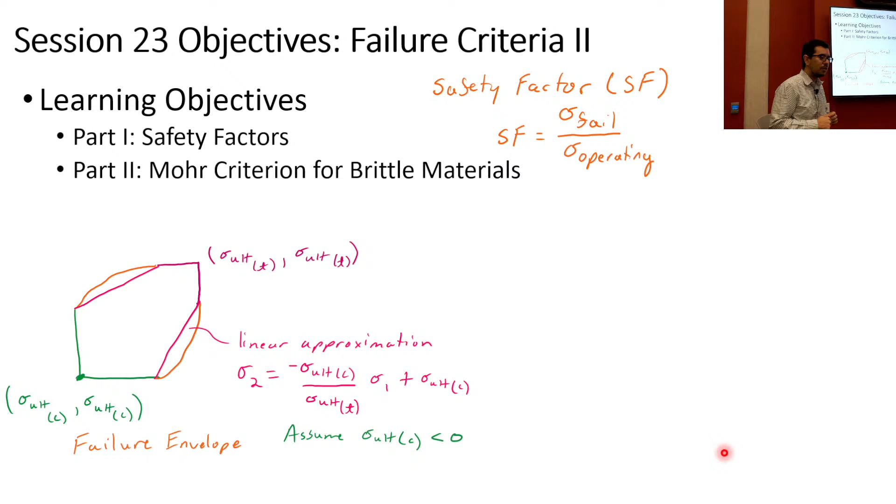All right, before we get to these great theories though, first we're going to cover safety factors. Okay, these are deceptively easy, okay? Because I get confused on them, and well, maybe it's just me, okay. But you might find them deceptively simple, okay? And then we'll get into a criterion for brittle materials, that's called the Mohr criterion.

And then we'll get into maximum distortion criterion for ductile materials, okay? So, what do you guys think of when you hear factor of safety? You can say maybe in the mechanical sense or the non-mechanical sense. Yes? Like an extra cushion to. Yeah, it's your extra cushion, right?

We have a buffer. We have our last day of no planned material because that's our cushion, that's our buffer, right? We didn't know what could happen during the semester. And we've been fortunate that we've been able to do stuff without too much impediment. Okay, so what else? How else do you all think of safety factor? Overrated? Overrated, like safety factors are overrated? Okay, I don't suggest that in your interview for an engineering position you say, that one's overrated.

That's overrated, really, we just go for the leading edge, right? We just go for the leading edge, and if it fails, it fails. Yeah, that's probably not a winning strategy, okay? So, like we're talking about this cushion, right? If I'm going from College Ave to Livingston, right, how much time do you put in there? What would you estimate, 20 minutes? Okay, College Ave to Livingston, all right, fine, 20 minutes. And then how much variability? So that's how much time you estimate, but if you want to be on time, how much of a buffer do you put in?

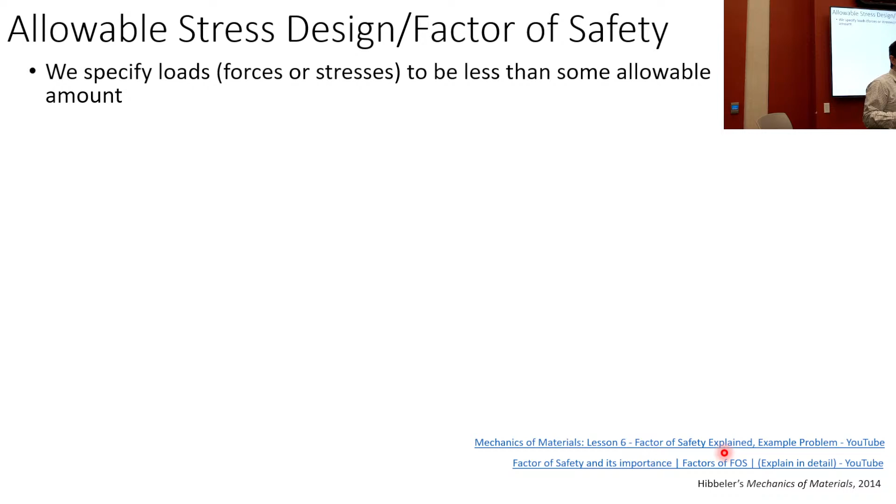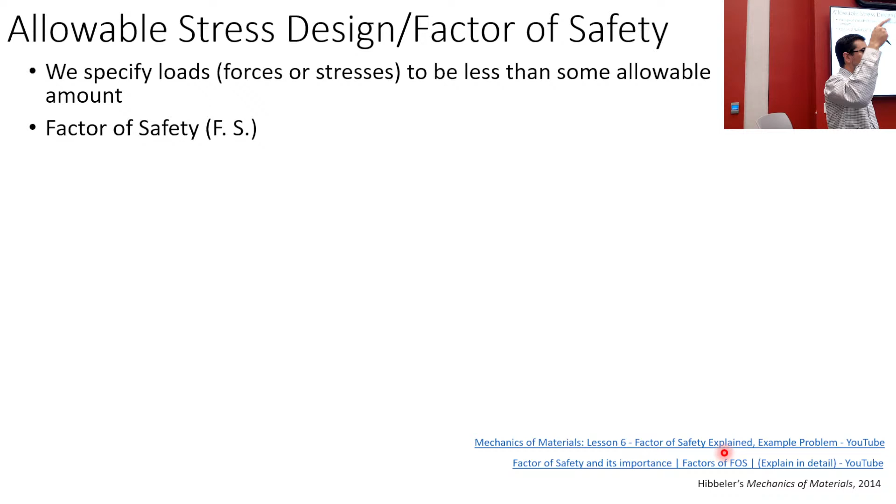We are going to specify in the mechanical realm that our forces, our torques, our stresses are supposed to be less than some allowable amount. We can think of the ratio of this allowable amount to what the loading actually is as a safety factor. Another way to look at it: this is the force that's going to cause the system to break, and I'm going to tell you, you better not go above a certain amount.

So, if you're making a table, and you know that table will actually break at 300 newtons of force on top of it, but on the instruction manual you say do not load above 200 newtons - that's 300 divided by 200, that's a safety factor of 1.5.

So like in thermodynamics we have quality as a factor, and that's supposed to be between 0 and 1. Is there a range for safety factors? Yes, I'm glad you asked that - good foreshadowing.

Okay, so if you're doing an aerospace project, your safety factor is going to probably be less than if you're doing a more conventional product for a mechanical system. And why would that be? Why do you think you would use a lower safety factor with a lot of aerospace systems compared to mechanical systems? Yes, people can die in aerospace. But when I'm using lower safety factors, does that mean there's more probability of death?

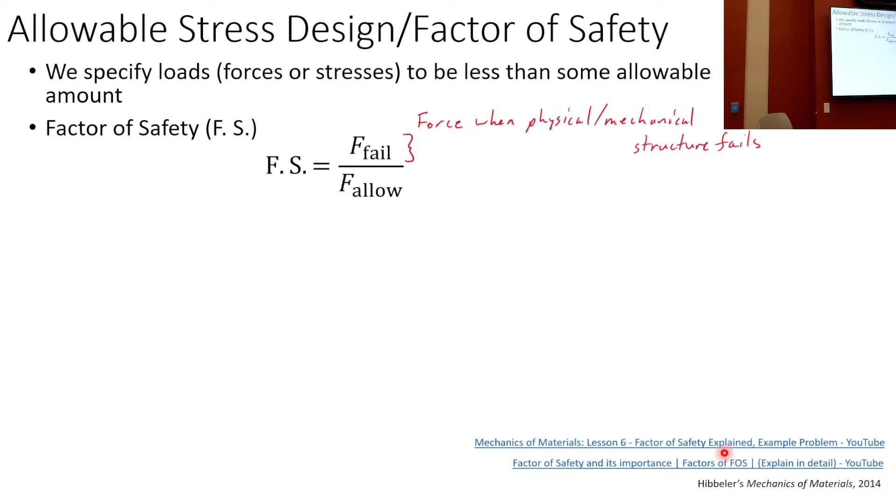Okay, so here are some different ways to think of safety factors. Safety factor could be a force when it fails. So this could be something akin to the yield strength times cross-sectional area. That would give you a force at failure over some force that's being allowed. So this is what you anticipate or specify the force that you can handle might be.

Another way to look at it is in terms of the stresses. So you can think of this as the stress at failure, where you would plug in sigma y, your yield strength, or you might plug in your shear strength, and divide by what your load is. And here's the shear form. So we're going to do larger than 1 for these, okay?

Have any of you ever broken anything? Okay, chalk? Yeah, last time, yes, Jeffrey, we did. Jeffrey, we did break some chalk last time, right?

Often, the whole structure doesn't fail all at once, right? That would be a wonderful design. It's like you've got it perfectly set up so that when you put that load on, it all breaks at once. Would that be wonderful? No. So as a designer, as a mechanical engineer, you're going to be looking for the hot spots, and you're going to be beefing up those areas and making sure the system is able to handle this. So if you think about F fail and F allow, that's more like a global thing, but then you're also looking at what the local stresses are.

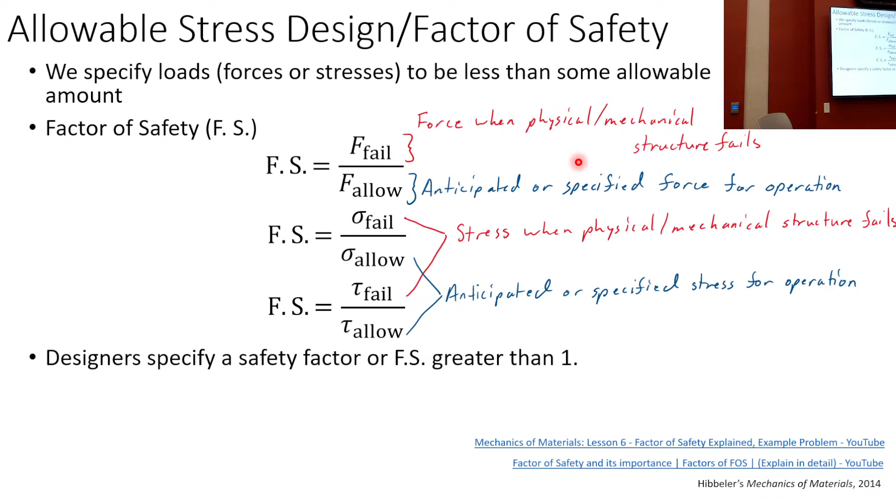So another way to think of the safety factor is as what your stress fail would be, divided by your operating stresses that you anticipate. And as we were saying, the wording can be confusing. You'll see that in a minute. I don't think I have to say much more about that. The wording can be confusing, all right?

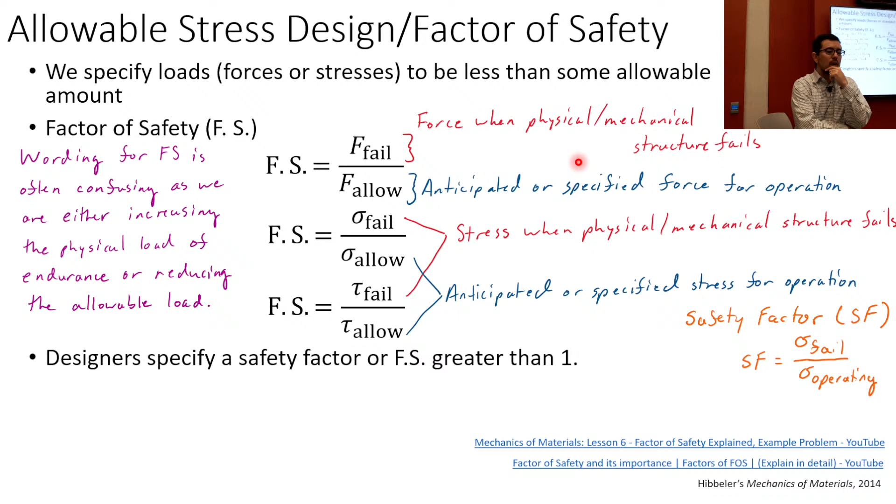But we can change your safety factors, obviously, by either lowering the allowable load or increasing the maximum stress, okay? And if you want to look at a fun, thought-provoking video, you can learn a little bit about planned obsolescence.

Okay, are you familiar with this term at this point? You all probably are at this age, in your generation. Planned obsolescence, what is it? So is it in a company's best interest for you to buy one product from them and never buy another product from them? Oh, plan failure? Yeah. No. So is it in their best interest?

Like Ford and car manufacturers back then, yeah, so car breakdown, right. All right, what else do you replace every few years? Tires, yes, tires. So if your tire's not as strong as it could be, so that they have to come back and buy them again. Not that they refuse it, but it's an idea, all right.

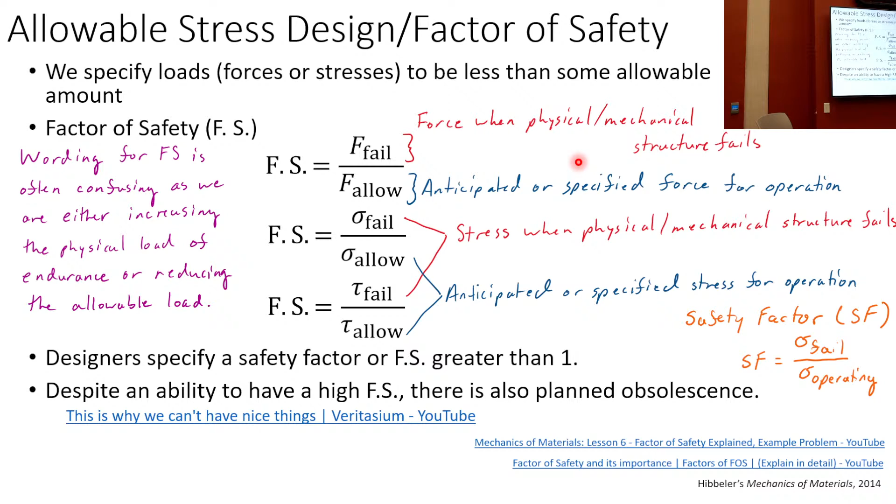And Chris was talking to me about this, phones, all right? The older cell phones lasted for a while. Now we have dates when we know they're no longer going to update the security things. Good day. But instead, it's planned obsolescence. Okay, let's keep going, I'm going slow.

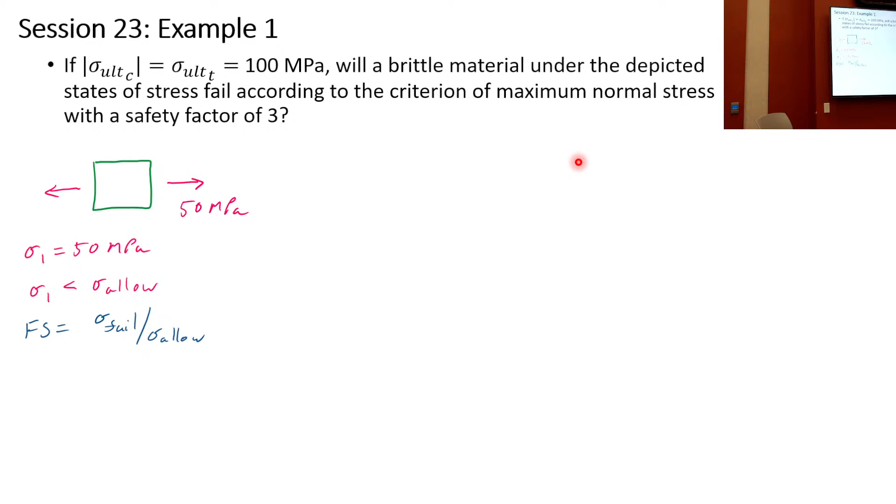100 megapascals, right? Okay, what is Fs? Fs is the factor of safety. They're saying that needs to be 3. So what does that make this allowable stress? 33 about, right? 33 and a third. So you put it all together and you now know that your allowable stress is 33 megapascals.

And that is not greater than sigma 1. So you're gonna have to... Okay, see how this works? No, okay, what's the question?

Everything? I actually don't understand the 50 MPa. Where does it define what it is? Professor, it's just that, I'm so sorry. It's just that the result, if it's less, that's the result, that's correct, that's what you're saying.

Right. So if we go above the allowable, we have an issue that it's going to break, right? Or we're not - it may not break, to be honest, right? But it doesn't satisfy the specified maximum, all right? Which is based on the safety factor, right? That allowable is the max that we are going to withstand.

The 50 megapascals, this is an element. We did this last time - we actually had the same exact box. This is a uniaxial loading, all right? Meaning this is an element that has just sigma x or sigma y or sigma z, in one direction. So sigma 1 is equal to 50 megapascals, sigma 2 is equal to 0, and sigma 3 is equal to 0. So this is the current stress, this is the state of stress on an element.

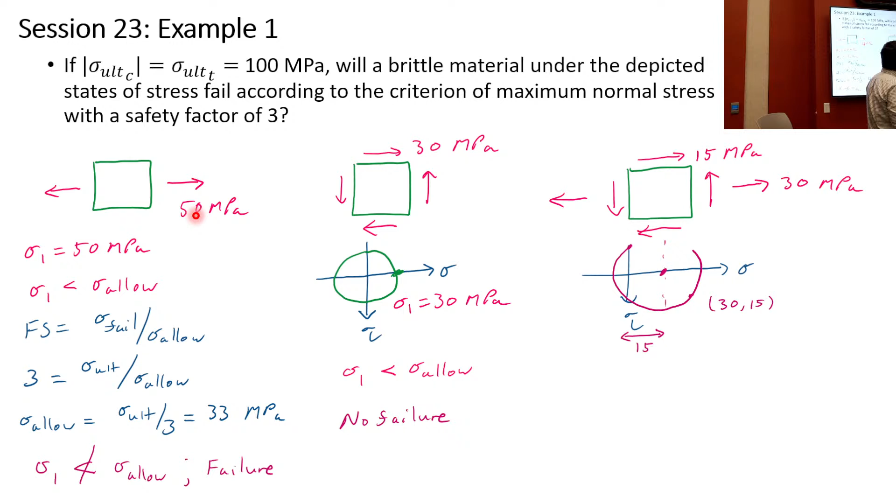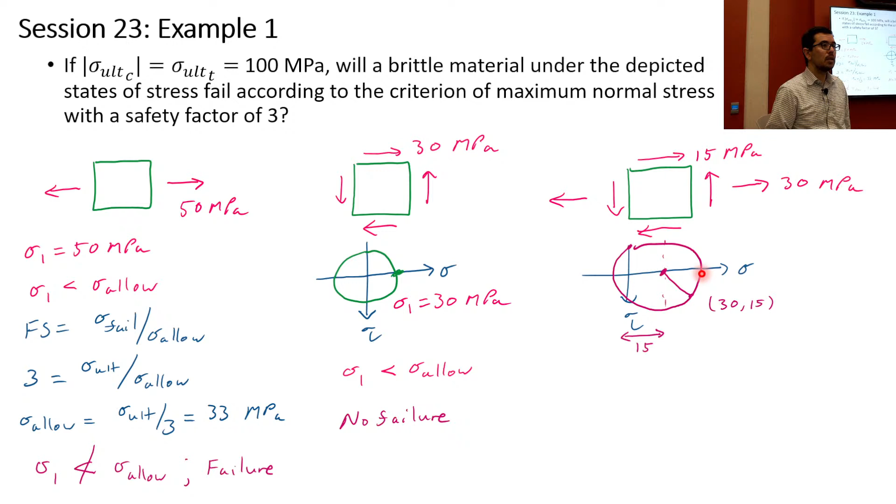So now we got to figure out, if we rotate over to here, that's where the maximum stress is going to be. So let's look at it. Sigma 1 is going to be what? It's going to be 15, right? That's the average, right, is 15, right? The average between sigma 1 and sigma 2, right? Sigma 1 plus sigma 2 divided by 2, that's just 15, because sigma 2 is 0. So that's where we are - or sigma y, sorry, sigma y is 0, I should say it like that. So sigma x plus sigma y divided by 2.

That's that, okay? And then here, this is at an angle of 45 degrees, okay? Because this is 15 here, and this, okay, is out here. So then we can say that the length that we're going to have over here is going to be 15 square root of 2, and then we add it to the average, and that's how we get 36. So 36 is not less than the allowable, okay, which means that we will have failure.

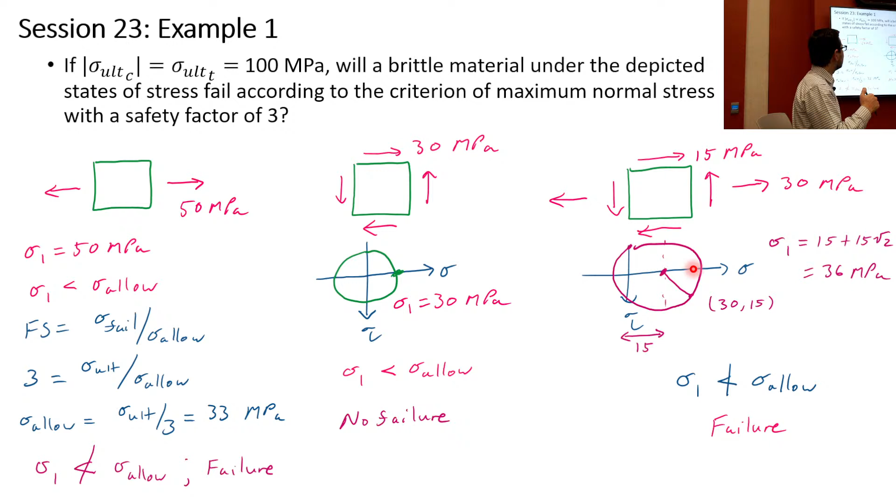All right, so what I'd like you to do is take a minute and look at this one. This is your first homework problem. And then after you've taken a look at this one, there's another one too. But take a look at this one first.

Your numbers are different than mine, but you have a sigma x, and a negative sigma y, and the other stresses are all equal to zero. Now the question is a little bit flipped, because it's asking what is the safety factor according to the criterion of maximum shear stress, if the yield strength is 200 megapascals.

So this is a little bit tricky, right? No, it's not? Okay, so if I give you a yield strength of 200 megapascals, let's look at it this way, because we're using maximum shear strength criteria. If I give you a yield stress of 200 megapascals, what is the maximum shear stress that material can handle?

So if this is the yield stress, I hand you this material - it's a piece of steel or a piece of aluminum, and either one could have a maximum yield strength of 200 megapascals. I ask you, without looking at this element or this configuration of stuff going on, what is the maximum shear strength of this material? I said the yield strength is this - you tell me how much shear can it handle?

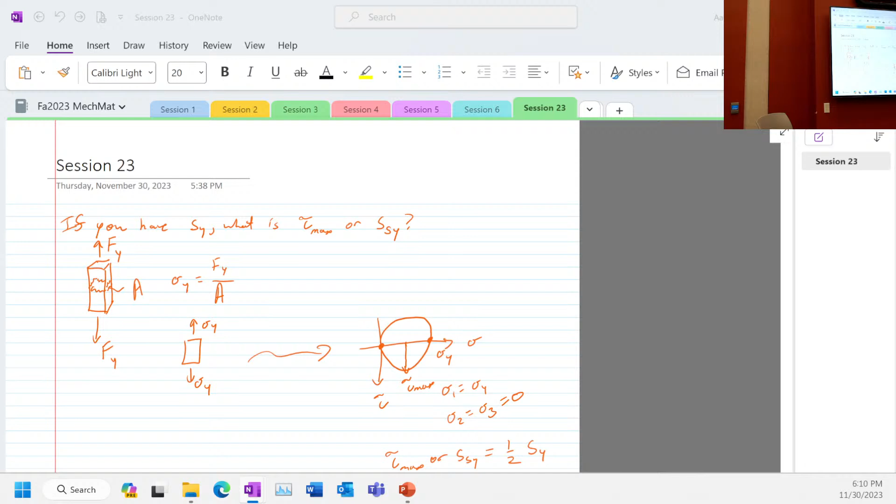So what's the maximum shear stress that I can have? Right, the maximum shear stress is down here. And that's going to be... okay? Any questions on that? So to even start this homework problem, you probably want to think about what is the maximum shear stress the material can handle. So now we know that's the maximum shear stress the material can handle. What is now the...

So let's go back. Can you see this? Yes. Okay, so that's the maximum shear stress the material can handle. What is the maximum shear stress now in the part? That has to be calculated carefully. If I told you - so we've got this element, this is 100 megapascals, this is 50 in the negative direction. What does the Mohr circle look like here?

Okay, so this is saying that we have a sigma 1. What is the sigma 1 here? Yeah, so we'll say this is sigma 1. We could call this sigma 2 or sigma 3, the negative 50. Okay, all right. And then what's sigma 3 in this case? 0, right?

Okay, so what am I have, multiple Mohr circles, right? So I have this Mohr circle, I have this Mohr circle, right? And then what's the final one? It's the one that goes between sigma 1 and sigma 2. Or sigma 1, yeah, sigma 1 and sigma 2.

All right, so then what's the max that I have here? Yep. Okay, all right, so we could call this my operating, if you want, tau op, right? And this is like my tau allow, or no, I won't say tau allow, tau fail.

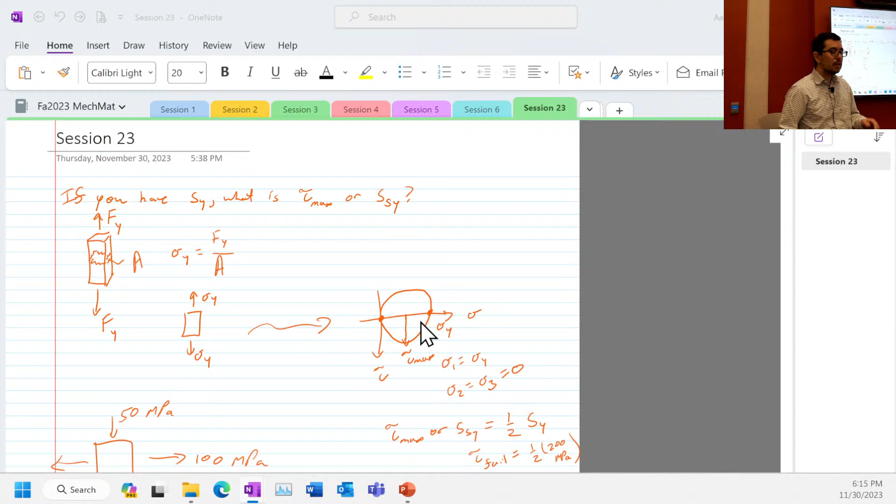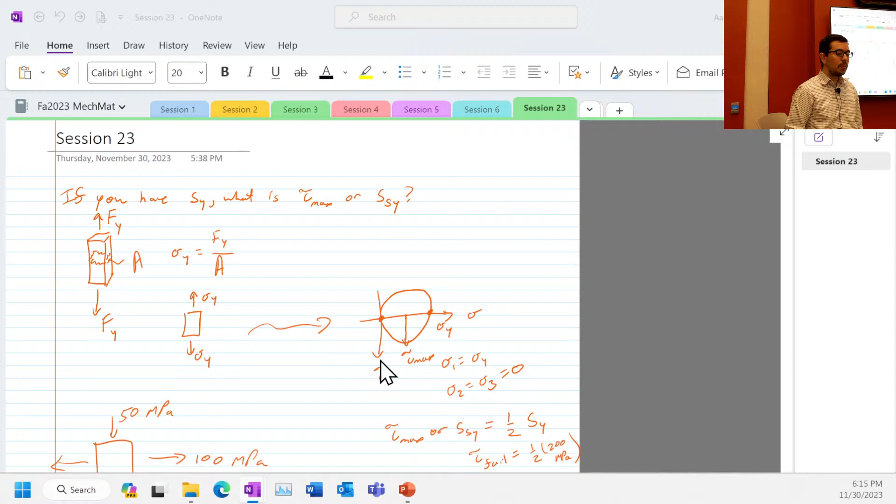Okay, it's because when I have uniaxial loading, when I calculate the yield strength, it's only in one direction. Sigma 2 and sigma 3 in this case are 0. But I need to know the maximum shear strength. Right, so for a lot of these problems, you have to construct a Mohr circle to know what the stress at failure is, so that you can compare that stress at failure to the stress during actual operation, or the allowable stress.

Okay? Any questions on this? Okay. Yes.

Okay, so if this is SY right here, do we agree on that? So what's this down here? Half. Is that okay? Is that right? Okay, no, I mean that's fine.

Okay, there were crickets a few minutes ago, so I guess there are multiple people who have had this question because there wasn't an immediate response. Yes, Kevin.

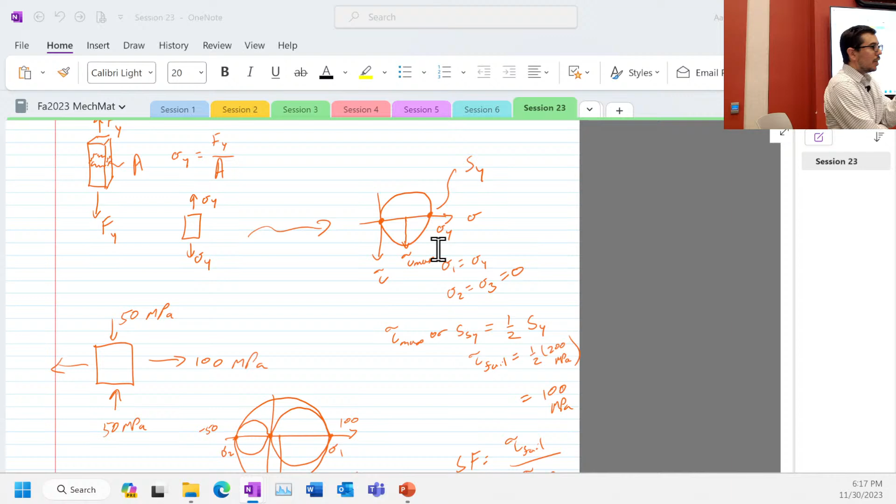In all situations, is the yield strength equal to twice the maximum shear stress then? Yes, in all situations. Well, okay, if it's a specified yield strength, and I care about the maximum shear strength, yes, that ratio is as we've defined here. But in this example, when you're only talking about shear stress, does that relationship still hold?

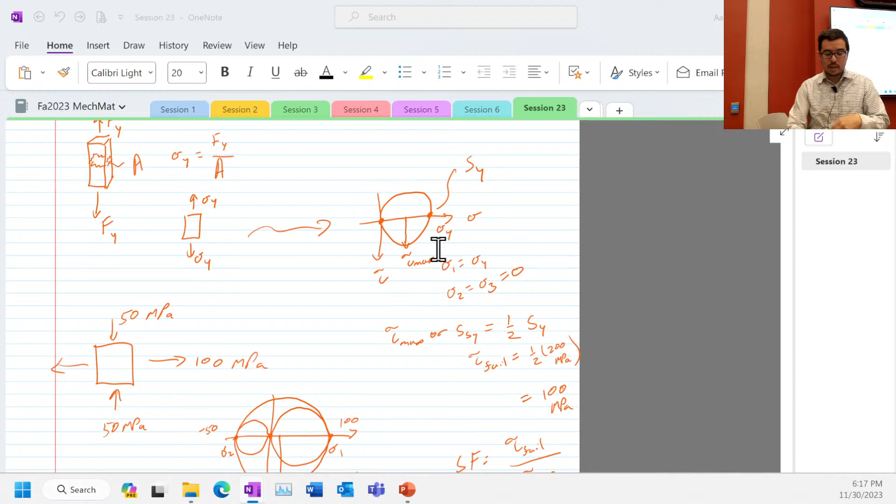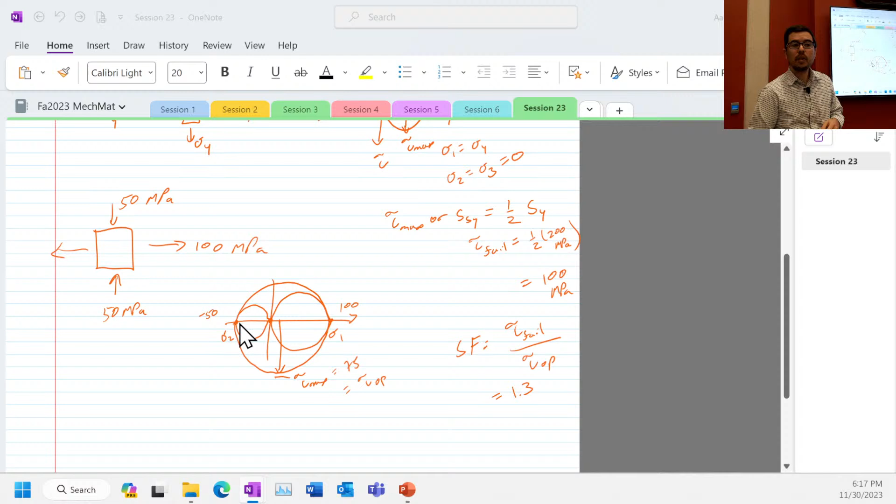When we're talking, so in this case, because we were, yeah, yeah. So with stress and with strain, the relationship is unchanged. Hold on a second, stress and strain, where does strain come into this? I'm sorry, I thought you just said strain a second ago. Oh, I'm sorry, I didn't mean to say anything about strain. Okay, I didn't mean to say anything about strain. Okay, if I said something about strain, it slipped. Sorry, okay, this is all about stress.

So the yield stress is always equal to twice the maximum shear stress. Yes. Okay, for this, for uniaxial loading, right? Okay, okay, okay.

But we'll get into some situations in a little bit where it's a little bit dicier, okay, where you got to think a little bit about. Well, we'll just get into them, and then I'll explain why it's a little bit dicier. Okay, you got to think maybe not just about what's happening with the yield stress or the shear stress, but you might think about the combo loading. Okay, and how if I increase both combos by the same factor, how that would affect a safety factor, right?

Because in this case, let's just look at it this way. In this case, if I increase these loads, the 100, I'm not showing the right thing. If I increase the 50 and the 100 by the same factor, right, that is, so for example, if I increase them both by a factor of 1.3, in fact, right? If I were to do that, okay, then I would have 130 megapascals here.

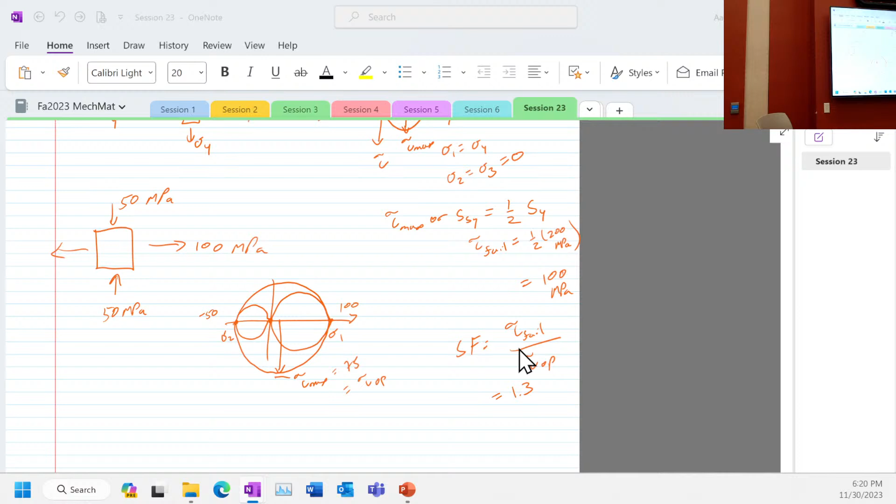Your first question is valid, about how the yield strength relates to the shear strength. Yield strength has a very specific meaning because it's for uniaxial loading, and that maximum shear strength also has a very specific meaning. It's 45 degrees rotated, and that's going to be the maximum shear strength.

When we start looking at things where we're just comparing shear strengths, what we have to be careful about is that you increase both proportionally. If I increase this by a factor of 1.5 but leave the other one the same, I'm going to get a different result. So often what you're looking at doing is multiplying both stresses to figure out what the new effective stress is so you can come up with a safety factor.

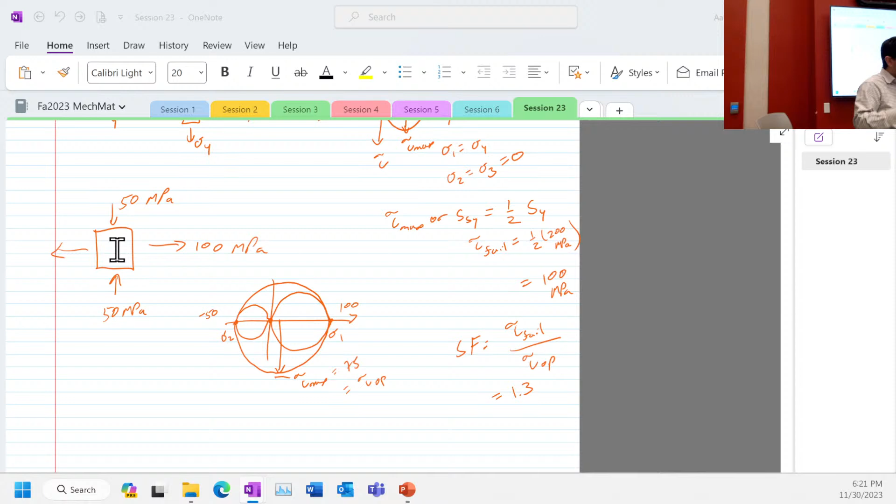Because the safety factor is just a number. If I multiply this stress by 1.5 and this stress by 1.2, that's going to give me something different, and you'll have a different safety factor. That may not scale proportionally. Okay, let's go on.

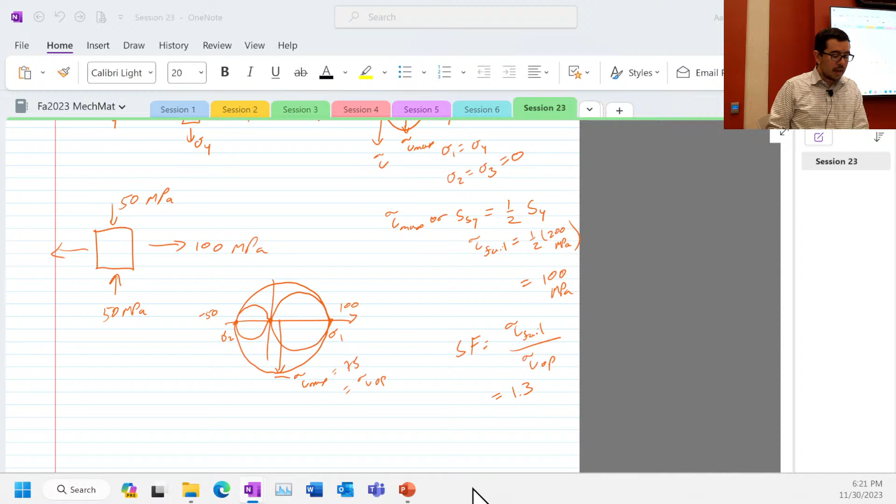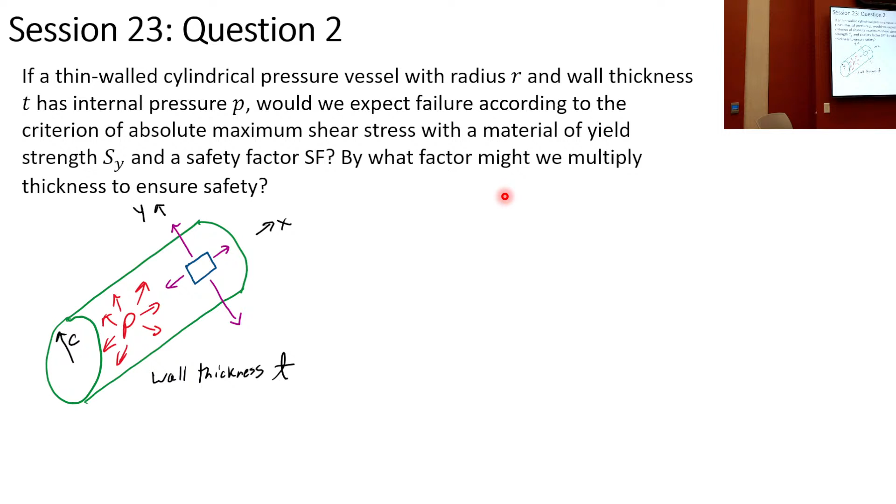The next problem is about a thin-walled pressure vessel. In this case we're asking a design question. You might have to think about increasing the thickness of your pressure vessel to make sure you get to an appropriate level of safety. So that's safety factors. Like I said, simple concept, but deceptively so.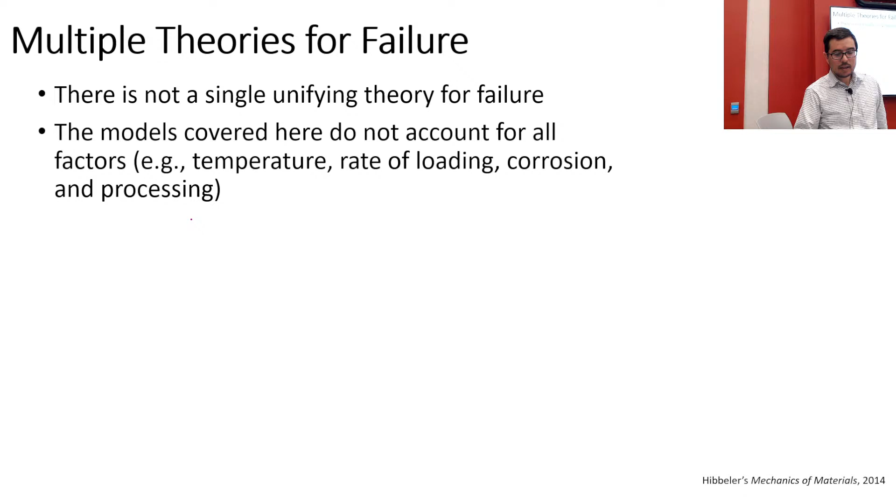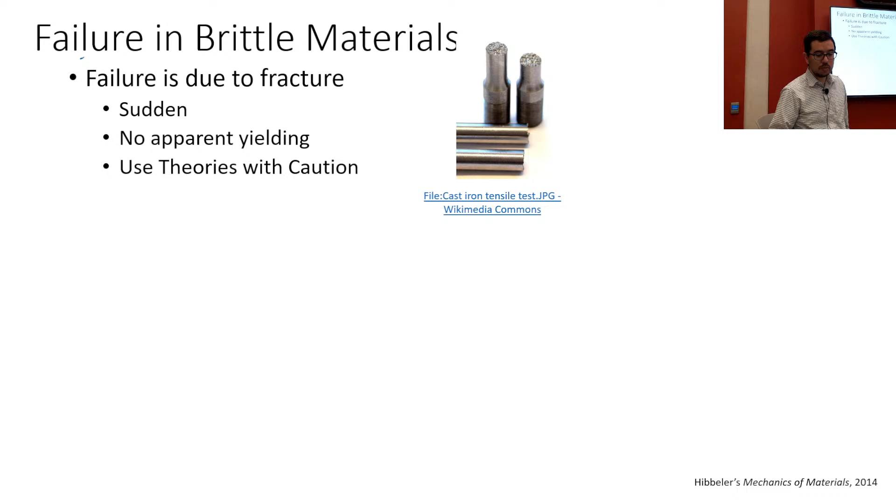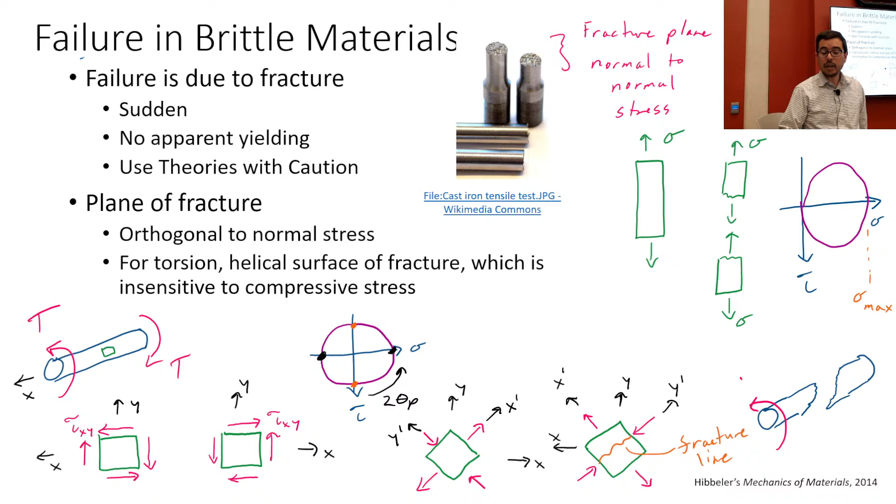Do you remember that we're supposed to use caution when thinking about brittle materials? This is old, going through it. Remember we were talking about how the breaking is due to maximum normal stresses when you have a brittle material. You remember this too, okay.

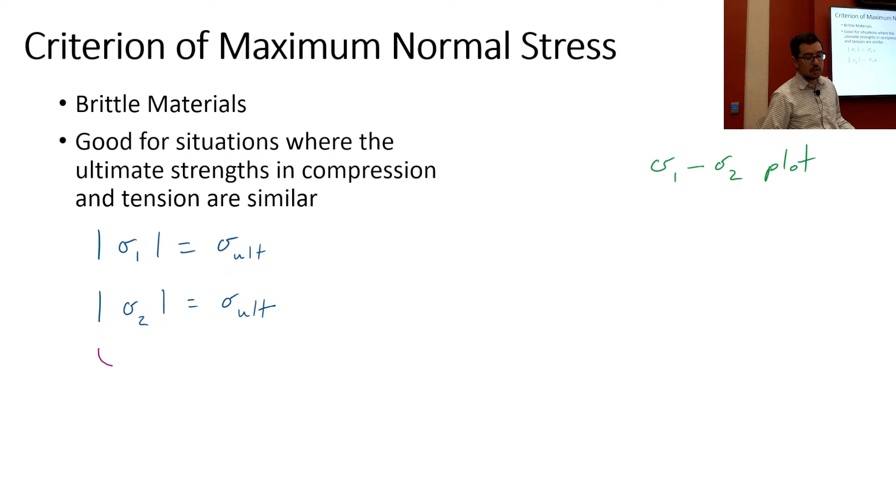Now, if we have the criterion of maximum normal stress, what we get is looking at whether we're between the field goals, right, you remember that too. Inside the box, failure is outside the box. Something I didn't use this term last time we met, but you can look at this as an envelope. If you're within the failure envelope, you're okay. If you're outside the failure envelope, not okay.

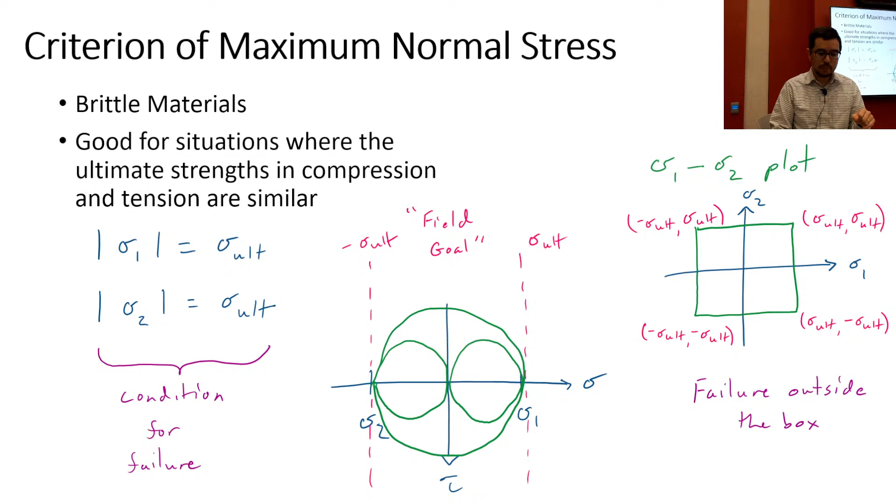We also talked about how the compressive strength is often bigger than the tensile strength, and I should have made this more clear. With brittle materials, often we care about the ultimate tensile strength and the ultimate compressive strength because they break and fracture, or yield and fracture, essentially at the same time.

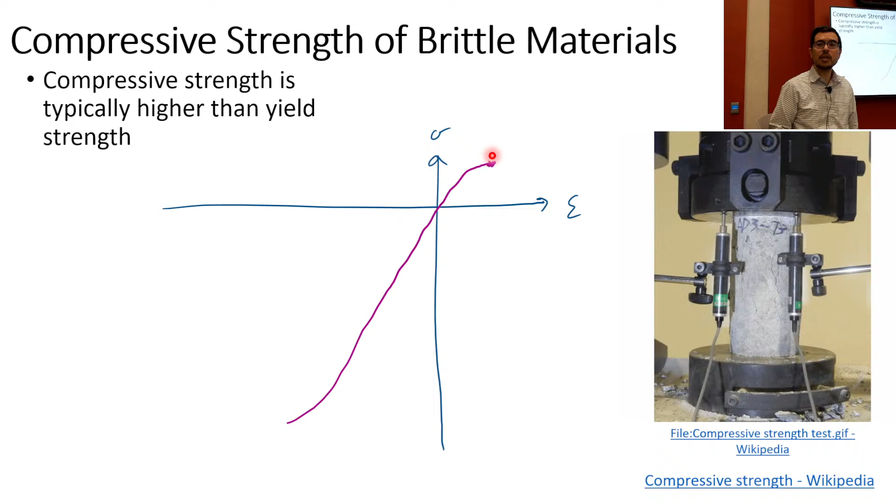So Mohr's criterion addresses the fact that this compressive strength is larger than the tensile strength. Remember we mentioned that? For brittle materials, that's often the case for ceramics.

So when you have a difference in these, you can get a value under tension, you can get a value under compression, and you could also get something under torsion if you want.

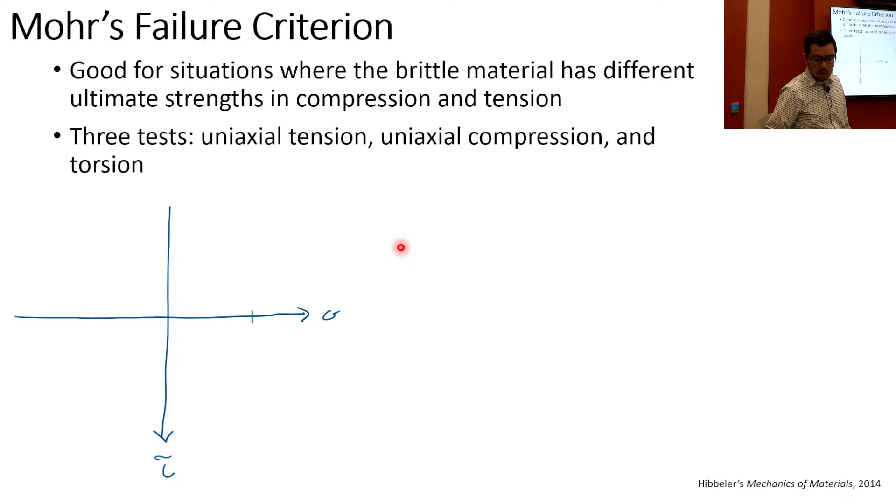The Mohr circle plot might look something like this. Here is an ultimate tensile strength, right out here. Again, we're assuming that the other two normal stresses are 0. Here is the compressive strength. This had to be done from two separate tests: one case you're pulling it apart, the next case you're compressing it.

And then the third test is a torsion test. That means the center of that Mohr circle is right on the middle axis, and it's a pure shear situation.

What do we do? We look at these 3 Mohr circles, and we come up with what we call a failure envelope that goes around them, like this. And this failure envelope on a sigma 1, sigma 2 plot

has some similarities to what we've seen before. If you're in quadrant 1 of the sigma 1, sigma 2 plot, guess what? Mohr circle out here, still pretty good. If you're in this Mohr circle, this quadrant 3 also pretty much resembles this.

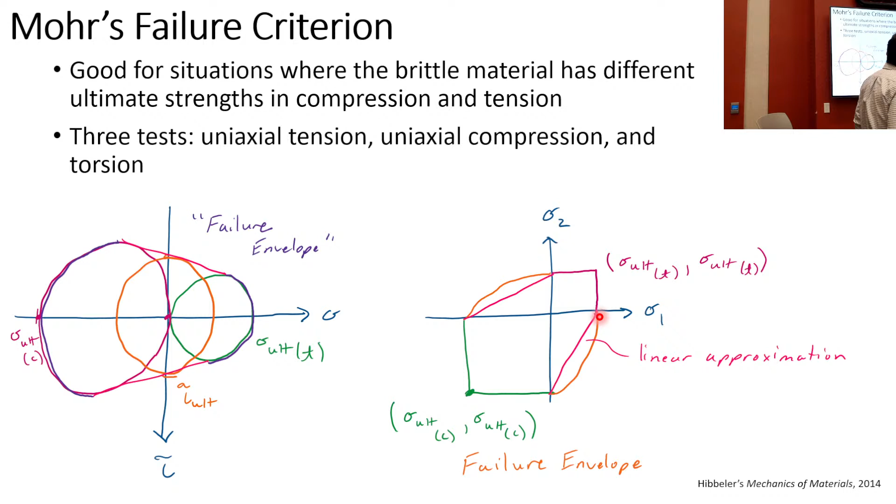But we don't plot that curve, or we don't create an equation for that curve. What instead we do is create a linear approximation.

And so this is kind of funny, right? Because you're like, wait a second, this kind of looks like the maximum shear stress criterion a little bit. Okay, because remember that we got those diamonds?

But now we have a different compressive strength and a different tensile strength. So what we end up doing is we figure out what this line is. How do you figure out what this line is? If you had to figure out that line, how would you go about doing it? Hint, hint. If you had to do this.

Good thing I don't have to do that right now. What's that? Oh, no, okay, you're doing something else. All right, so, yeah, how do you figure out those lines?

Yes? Yeah, right? Okay, so if I'm down here, right? Which one's my y-intercept? Maximum tau. It's going to be this one down here, right?

Well, this is not a tau, right? This is sigma 1, sigma 2 plot, okay? There is a tau over here, right? But you're going to figure out this is sigma ultimate compression, right? Or negative sigma ultimate compression, right?

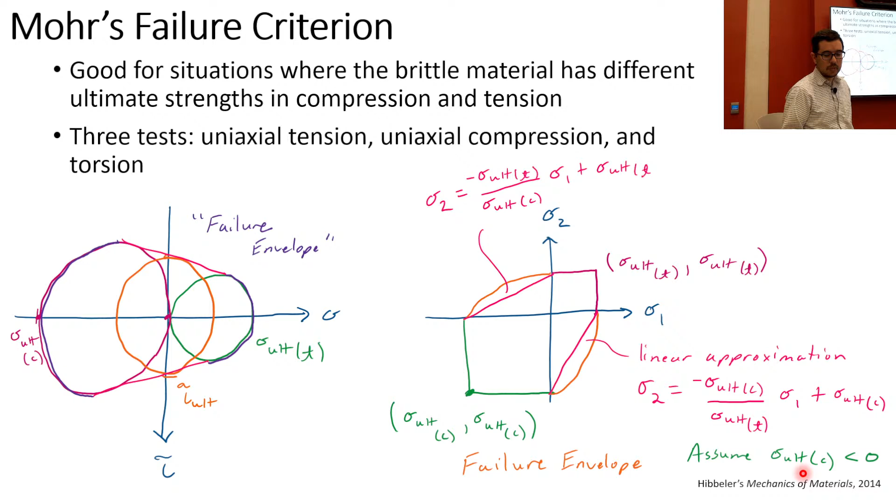Any questions on how you do this? On how you figure out what those lines are? Pretty straightforward, right? Okay. Now, and on the other side, you can write this like this. Okay. Let's look at an example.

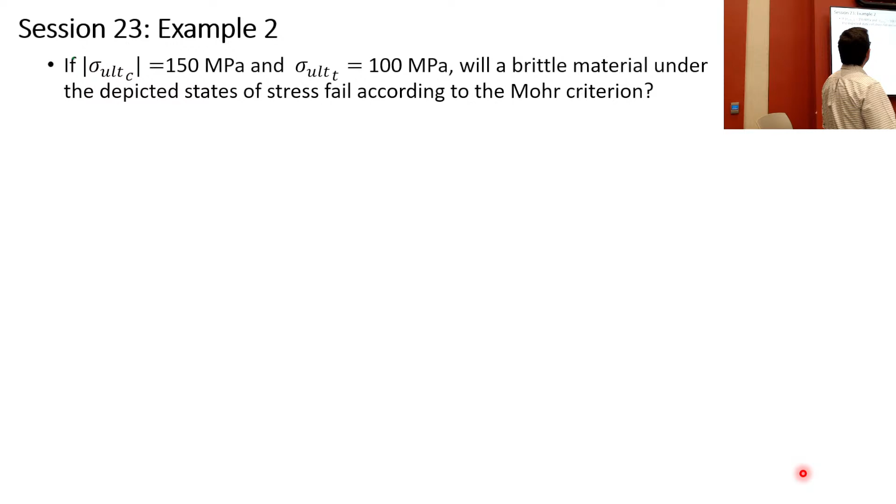We're going to say that you have an ultimate compressive strength of 150 megapascals and an ultimate tensile strength of 100 megapascals. And the question is, for this state of stress, which we've seen before now, is it going to fail? And for this state of stress, which we've seen before, is it going to fail?

Okay? And this is where I messed up. Okay, so let's look at what's going to happen. I'm not quite sure. Hold on, let's see. Okay, so for this one, sigma 1 equals 50 megapascals. Sigma 2 is equal to 0, which is equal to sigma 3.

What are we going to do? How would you approach this? I would draw Mohr circle, and then I would plot sigma 1 and sigma 2 on a sigma 1, sigma 2 plane, and use the parameters that we got where the top right corner was sigma ultimate under tension, sigma ultimate under tension. And I would just see if it is inside that box.

Okay, so in this case, for this one, it's probably easiest just to write down sigma 1, sigma 2 plot, skip Mohr circle for now. Okay? Because then you only have normal stress in your problem. And then draw this thing out using the linear approximation, right?

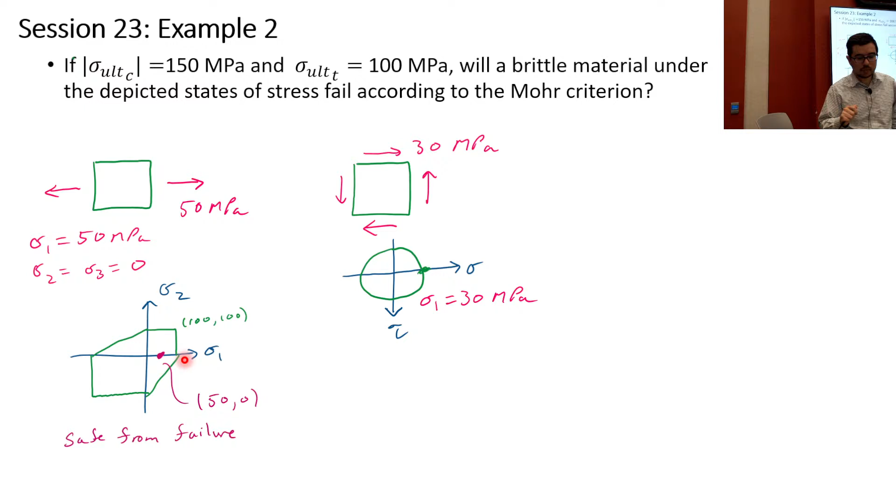The safety factor, that might be a little bit trickier. You can think of it as: if I multiply the safety factor times sigma 1, which is 50, how does it relate to the ultimate tensile strength? If I scale all the loads, the rest are 0, but I scale just that one load, how much can I scale it by and still be less than 100? I can scale by a factor of 2, so I get a safety factor of 2.

What about here? What am I going to do? Here I have 30 megapascals, and it's a shear stress, and I care about normal stresses. So in this case, I will make a Mohr's circle, because I want to figure out what my principal stresses are in the system.

What are the principal stresses? We've done this before. They are going to be positive 30, minus 30. Those are the two principal stresses. Then I take those principal stresses and I put them on a sigma 1, sigma 2 plot. And I am in quadrant 4 because sigma 1 is positive and sigma 2 is negative.

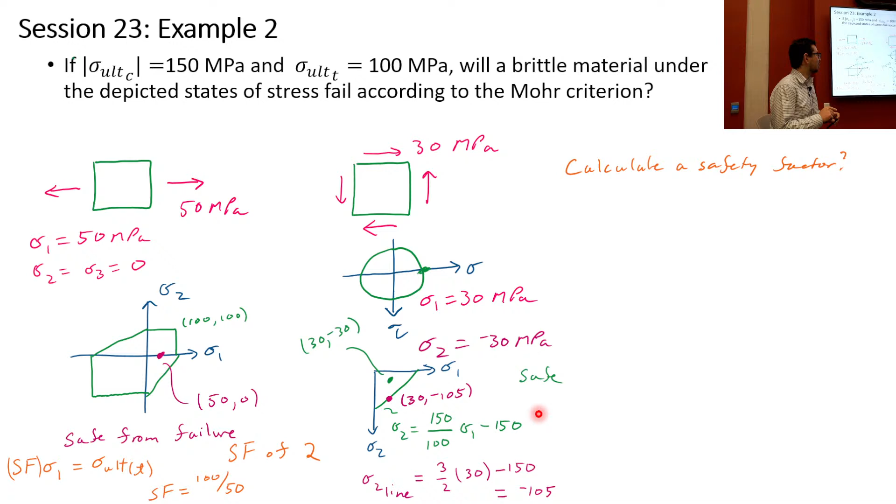So what do we know? We know we're safe, right? Everyone agrees we're safe? How do we figure out the safety factor? This is where it gets a little bit tricky. So how do we calculate a safety factor?

So we need a safety factor times sigma 1 essentially, to go outside of the envelope. If we're multiplying, we had this, and we have this. This is what we've got. We need this to go outside the envelope.

There's an interesting thing that happens here. So we're here, and what is it going to take for us to hit this line? That's the question. What's interesting here is if I multiply sigma 1 and sigma 2 by the same factor, they go along this line. What's the slope of that line? What's the slope of the purple one? Is it opposite? Orthogonal? Well, no, what's the slope? Just a number, I want a number.

What's the slope? The inverse of the other one, the negative inverse? Isn't it the safety factor? No, they're not orthogonal, not necessarily orthogonal. For one, what is the slope of the purple line? Negative 1. Thank you, you were going to say that, right? Yes, it's -1.

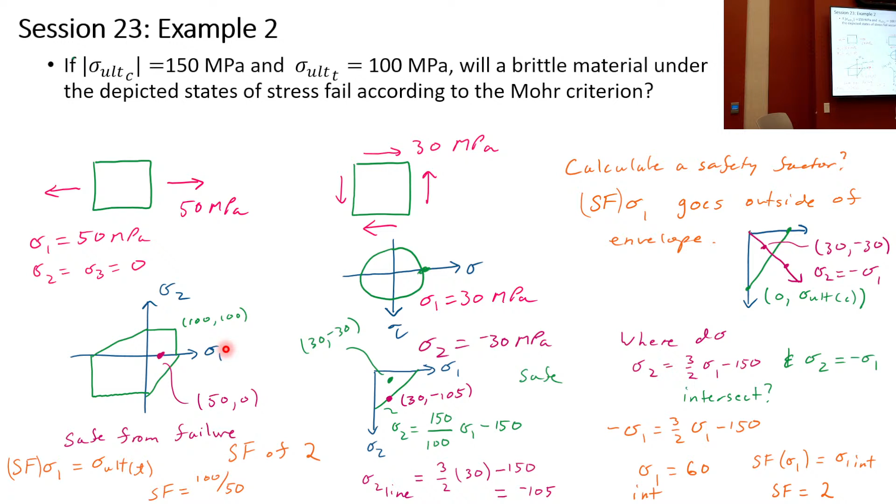The reason I use 2 points is because I have 2 normal stresses here, for the second problem. Here I only had 1 normal stress. So if I think about scaling the stresses, all the stresses, the only thing that scales is sigma 1, so this point just moves along the horizontal axis. So those are 2 different scenarios? Yeah, they're 2 completely different scenarios. But they both seem to have a safety factor of 2 - that's a nice coincidence.

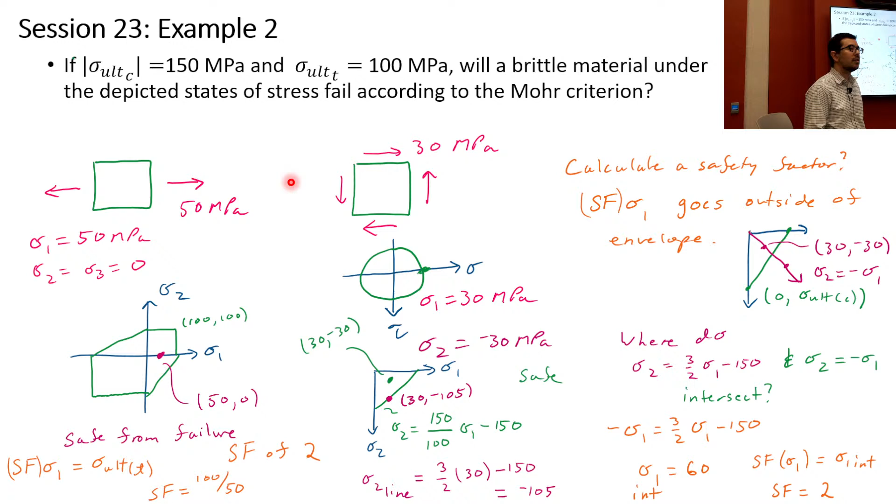All right, let's keep going. You guys have a question you can work on, but we don't have much time, so we've got to keep going. This question will allow you to get a little bit of experience using this new criterion, the Mohr's criterion, for calculating whether or not there's going to be failure.

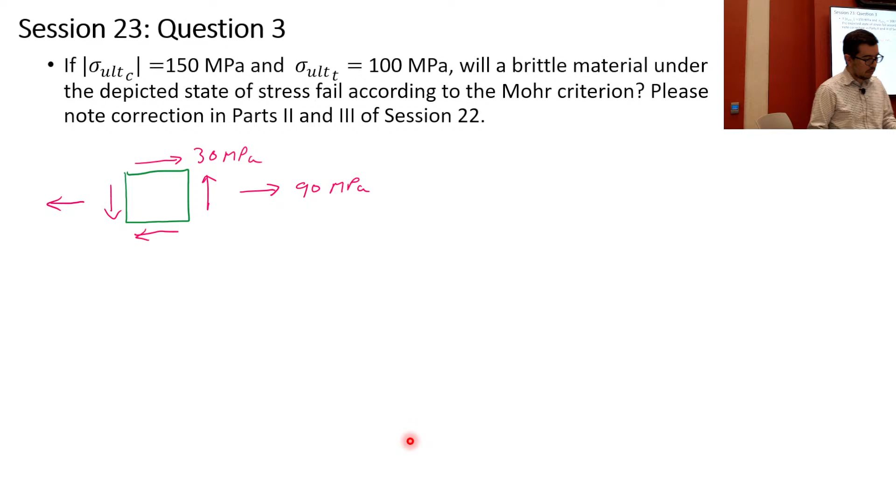Part 3 in our act is looking at what happens with ductile materials. This criterion is going to be something you see in your career. If you do anything where you're looking at breaking or yielding materials that are ductile, this is the one that everyone uses. So let's define a couple things.

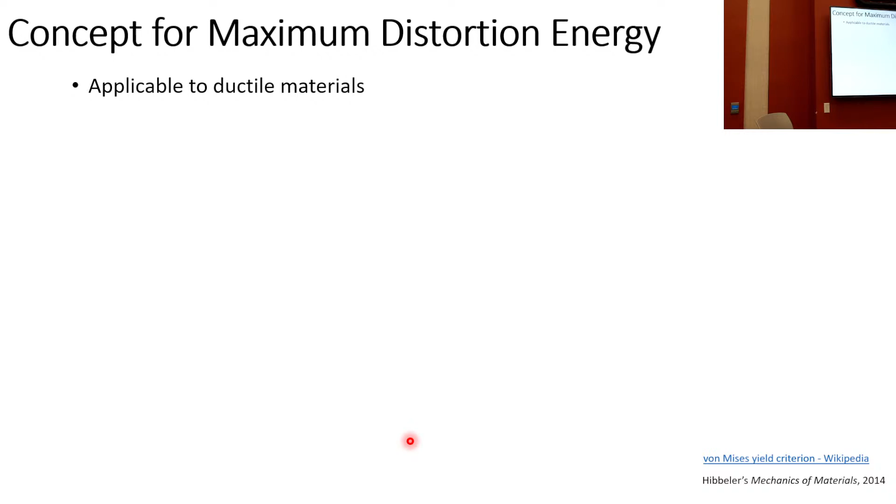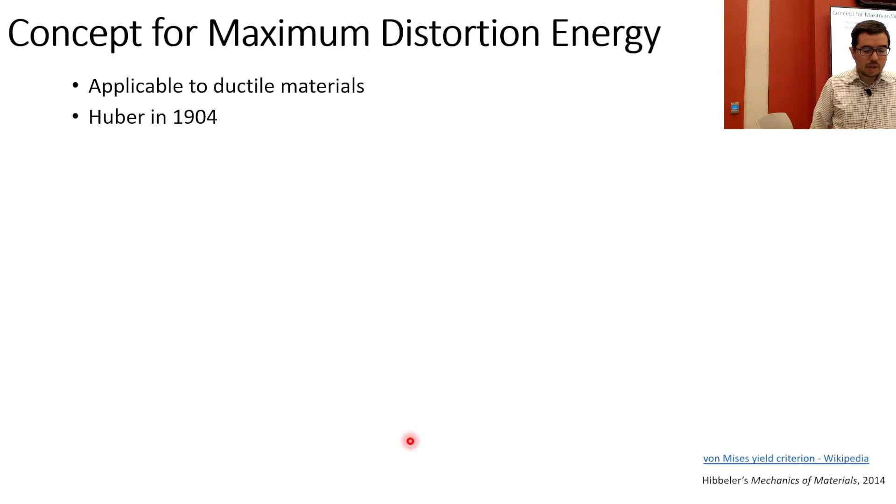Applicable to ductile materials - this was first done by Huber in 1904, but also known as the von Mises criterion, also known as the Maxwell-Huber-Hencky-von Mises criterion. So a lot of people got involved. There's one guy's name not in here, Tresca - maximum shear stress. Hencky, Huber, von Mises, who am I forgetting? Maxwell. This theory is about distortion of shape.

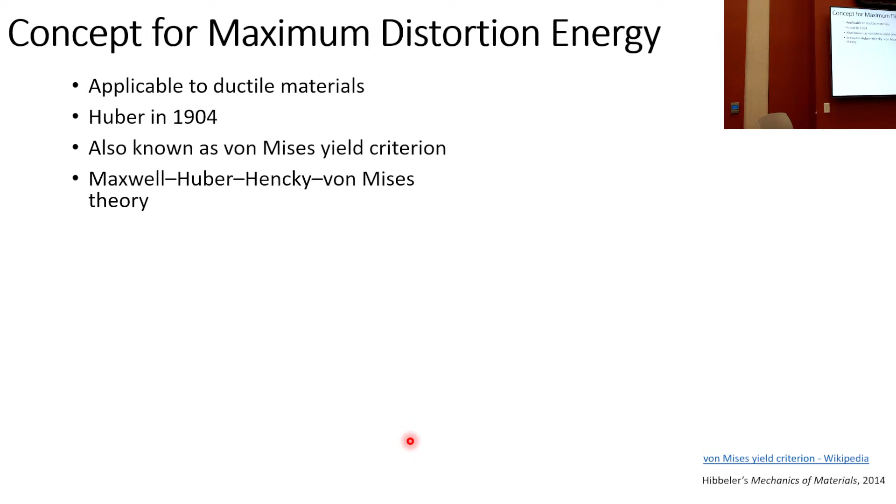So remember this nice little plot. U is strain energy, and that is the area under the triangle. And what is that? It's been a long time - that's a stress strain curve. Remember those, if you go all the way back? That's how you figure out the elastic modulus, for example - the slope of this line, the purple one, that's the elastic modulus.

So, you're like, duh - a material undergoes change in shape or volume with elastic loading. We agree on that? Yes. Do we also agree that we can store elastic energy within the material? Yeah, all right - if it's in the linear elastic regime, it comes back. We have problems when we go beyond the elastic limit, and here's where the interesting kicker happens.

For a ductile material, we say that under hydrostatic loading, it will not fail. So what does that mean? That means if I take a piece of metal that's ductile and drop it in the ocean, and it sinks and keeps sinking, the pressure keeps building up - the pressure is the same on all 6 sides if it's a cube, or the same on whatever shape it is - that piece of metal, if it's ductile, is not going to break.

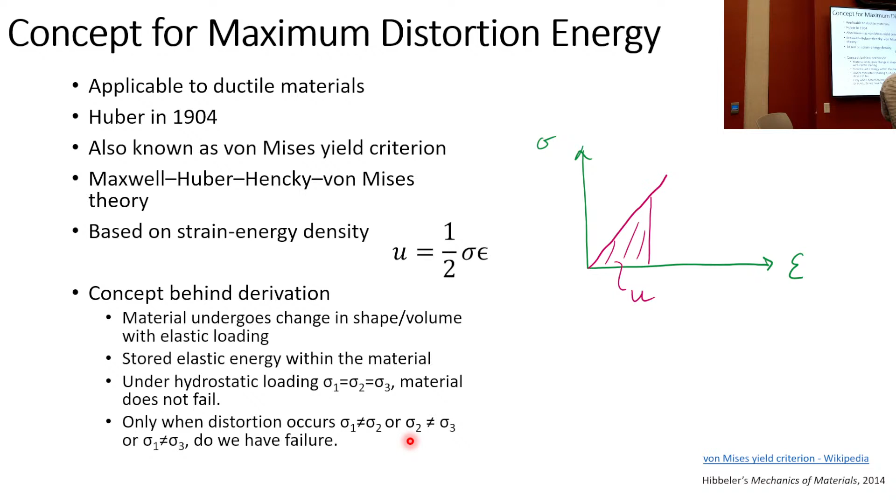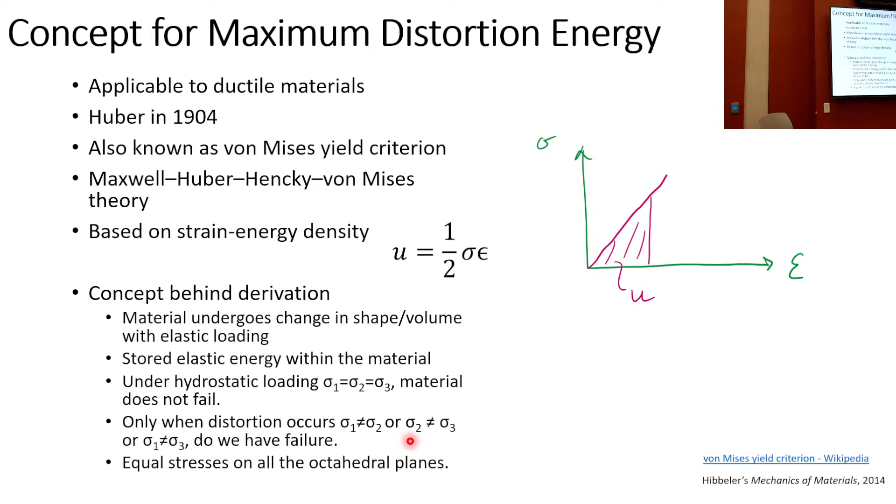It's only when you have differences in the principal stresses that you get distortion, and that causes there to be shear. So that's what these guys came up with—it's distortion, and you get distortion when there's shear. This is related to maximum shear stress, right? Tresca. Now you don't have to care too much about the last part, where there's equal stresses on octahedral planes. Don't worry about that.

But what we're going to do is go through the derivation pretty quickly. First, we start with strain energy density.

Then we think about this state of triaxial stress where you would only have principal stresses, and then you calculate a strain energy density. You remember? So you get this. This was one-dimensional; this is three-dimensional. And sigma 1, sigma 2, and sigma 3 are quantities—they don't have to be equal here. And there's no shear stress in this particular orientation.

Then, Hooke's law—you remember that one? That's fun. And what we're going to do is we're not going to think about epsilon x, epsilon y, epsilon z, but instead epsilon 1, epsilon 2, epsilon 3, and sigma 1, sigma 2, sigma 3.

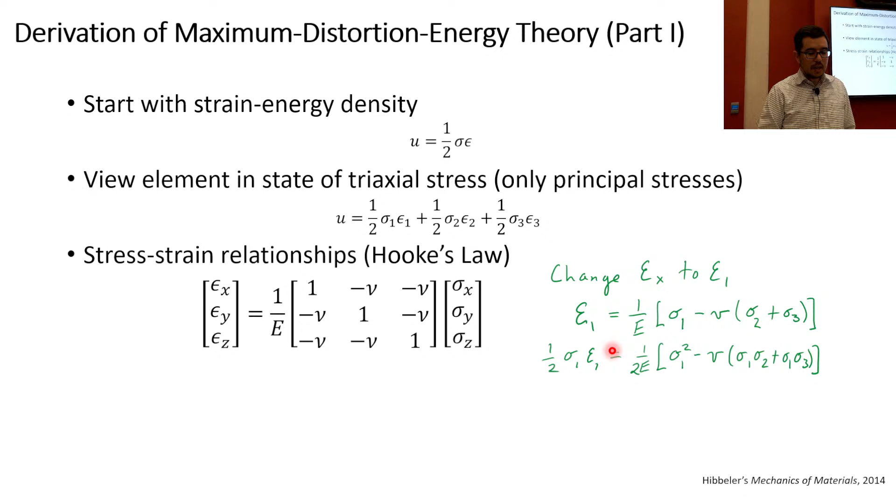And we can write out these relationships, where epsilon 1 is equal to this, and then we have sigma 2 and all this, right? We can write things out where if we multiply by one-half sigma 1, we get this expression. That's kind of a weird one, right? Where did that come from? That's a little bit weird, but it mathematically makes sense.

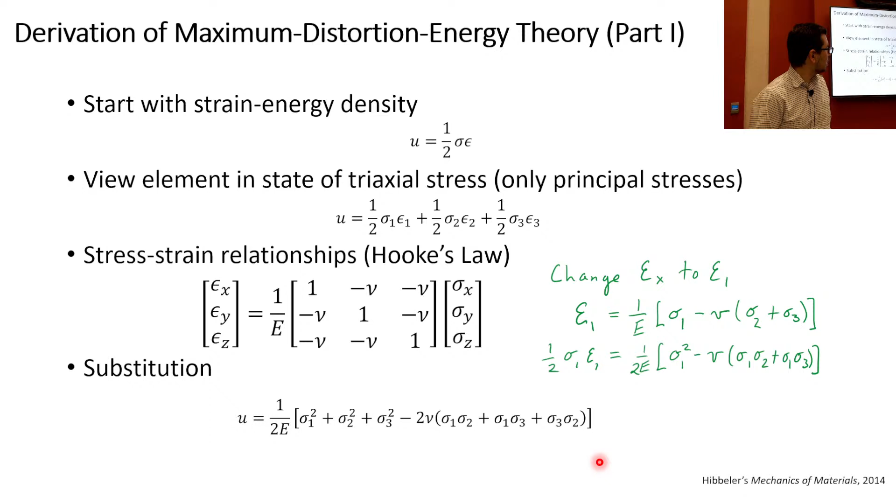So then what do we do? We substitute in these expressions into our strain energy. Right? You see this—this is one-half sigma 1 epsilon 1. And so we can substitute that in. We can substitute in the equivalent for the sigma 2 epsilon 2, right? We can substitute all these in, and this is the expression that we get after we do this substitution.

Then, what are the distortional components? The distortional components of stress are not that mean stress, but the difference between sigma 1 and the average, the difference between sigma 2 and the average, and the difference between sigma 3 and the average. So I've come up with this—this is the average stress, these are the differences in the three different directions, and these are causing distortion. And we go back to an earlier assumption that yield is going to result from distortion.

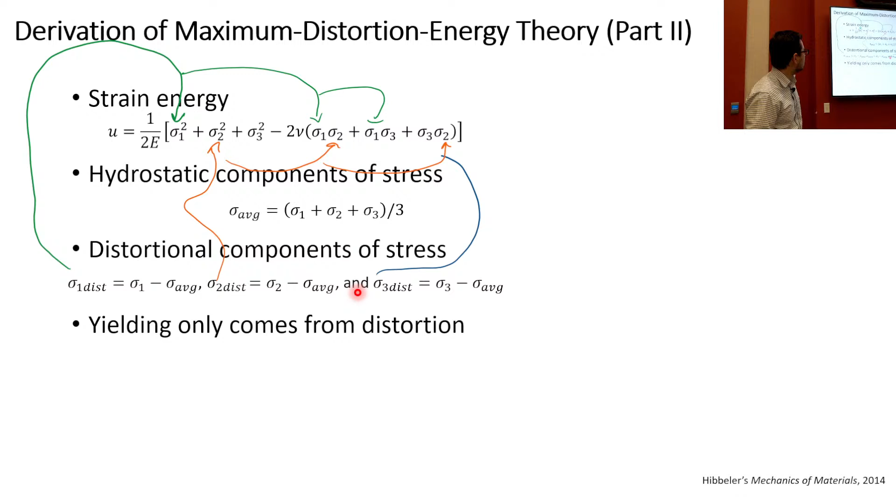So when we do that, we plug in these expressions. We have a sigma 1 over here, we can plug that in. We have a sigma 2 over here, we can plug that in. We plug all this stuff in, and this is the expression we get. This is the strain energy due to distortion.

So UD is not the same as U, but this is the strain energy due to distortion. So now, once I've come up with this expression,

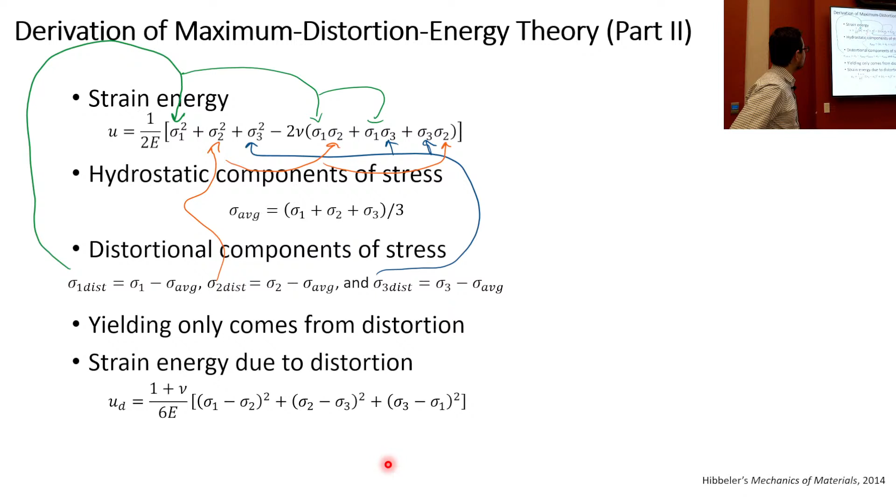we can think about what happens in uniaxial loading. Sigma 1 is equal to something, sigma 2 and sigma 3 are equal to 0. And we can figure out what strain energy we expect at yield, because we can plug in the yield stress. We plug in the yield stress, and now we have a strain energy due to distortion at yield.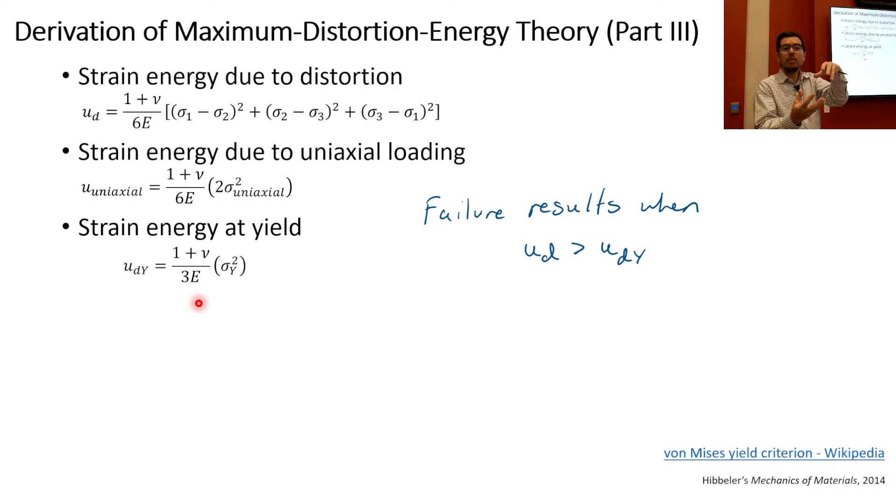Failure happens, in this case, when the specific strain energy due to distortion exceeds the specific strain energy due to distortion at yield. So if I have a material and I pull on it and I get too much distortion energy in it, that's when it's going to fail. That's when it's going to yield.

Now what you can do is equate some of these things to each other: this strain energy and this strain energy, strain energy at yield. And you can say there's going to be an equivalent uniaxial stress for a given state of loading.

This is a little bit wild. It's kind of like saying, before I could figure out what an equivalent maximum shear stress was, remember that, that was the maximum shear stress theory. I figure out this is the absolute maximum shear stress for a given state of loading. Now we're saying this is the equivalent uniaxial stress, and this is what we compare to the yield strength.

Remember we had a factor of 2 business that was not so fun? What we're saying now is you can calculate the effective uniaxial stress and compare this directly to the yield strength, sigma y. So you compare this to sigma y, or Sy, and if the uniaxial stress is greater than sigma y, you have a failure.

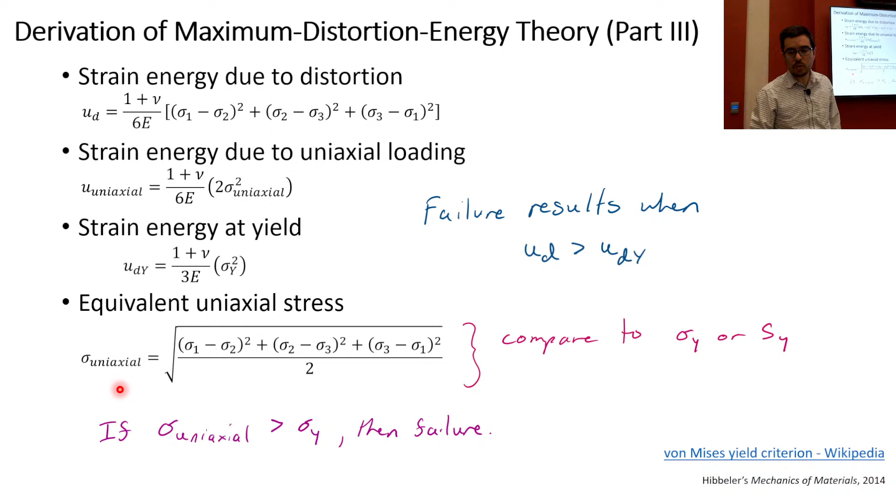So here's some takeaways, and you want to write both of these on your equation sheets. This uniaxial stress equation, well actually, you guys tell me, what's the difference between this one and this one? What's the difference between the top equation and the bottom equation? Paul?

Yep, I agree. So the bottom equation is: give me the state of stress, come as you are, plug it in, and I spit out an equivalent stress. The top equation means you've already done some work, or you already have a principal state of stress. So the top one is really useful when all you have are normal stresses, because that's the state of principal stress, so you just use sigma 1, sigma 2, sigma 3.

The bottom one is very useful if you have a box with shear stresses and you don't want to use Mohr's circle. You could use Mohr's circle to figure out what the principal stresses are and then use the top one, or you can just plug it into the bottom. So you want to have both.

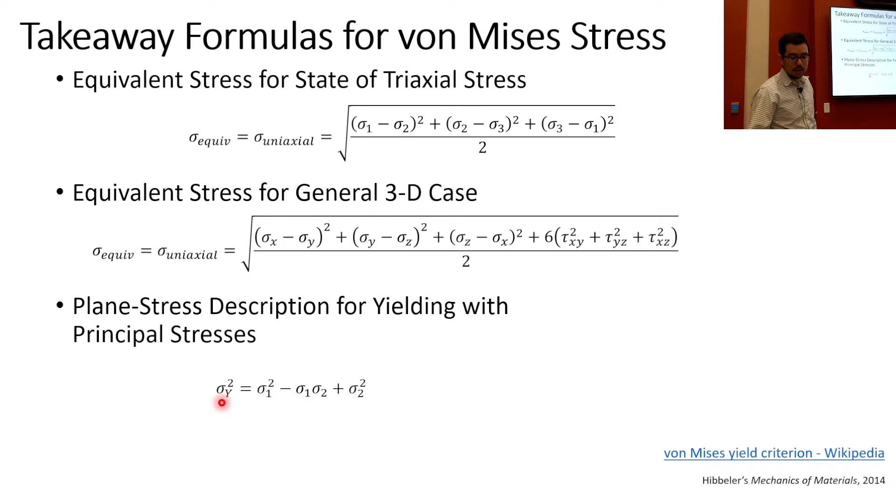And if it's a plane stress situation, it turns out this is the envelope on a sigma 1, sigma 2 plot, based on the yield strength. I'm running out of time, so I'm going to jump through this. The envelope looks like this. It's an ellipse, and it goes with a diagonal like so.

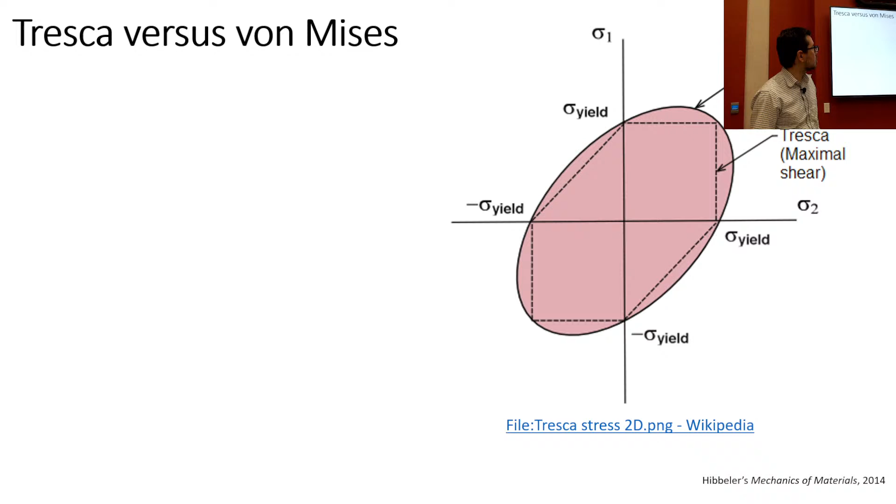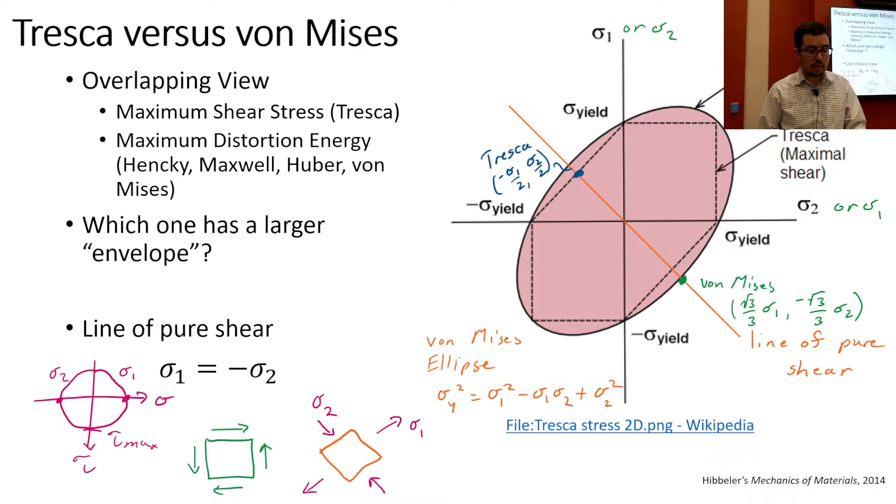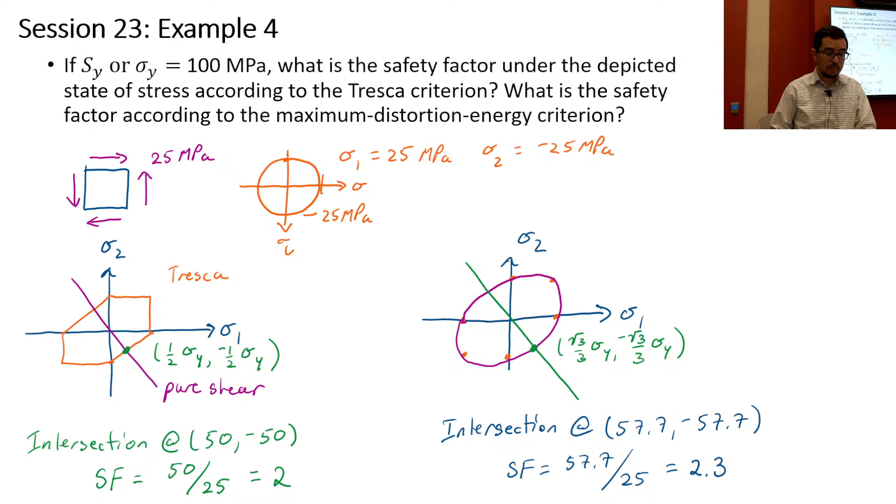We're out of time, so I suggest, before next time, take a look at the video. I go through much more detail discussing this line of pure shear and what these different points are and how they compare. And you've got a couple problems you can look at for examples, and you can also look at the comparisons between these different criteria.

So what did we cover today? We covered safety factors, the Mohr criterion for brittle materials, and the maximum distortion energy criterion.

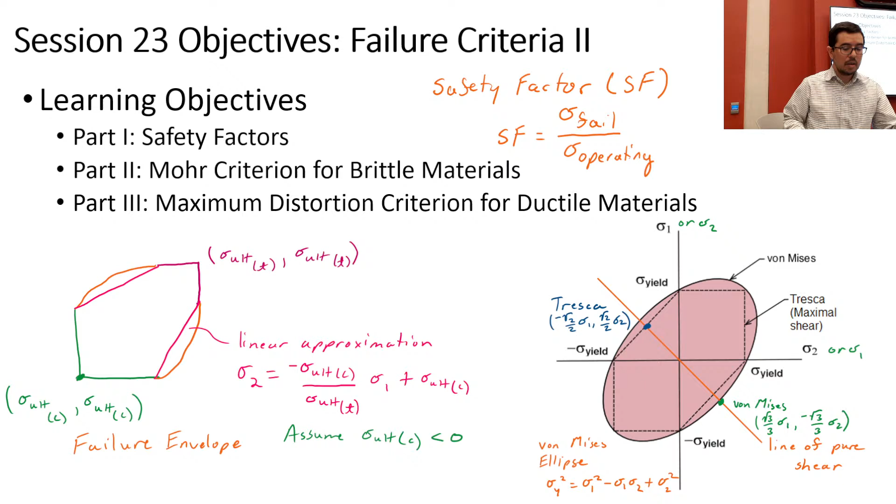Yes, is there like an expected time? Boy, I think it's tomorrow. You said tomorrow.